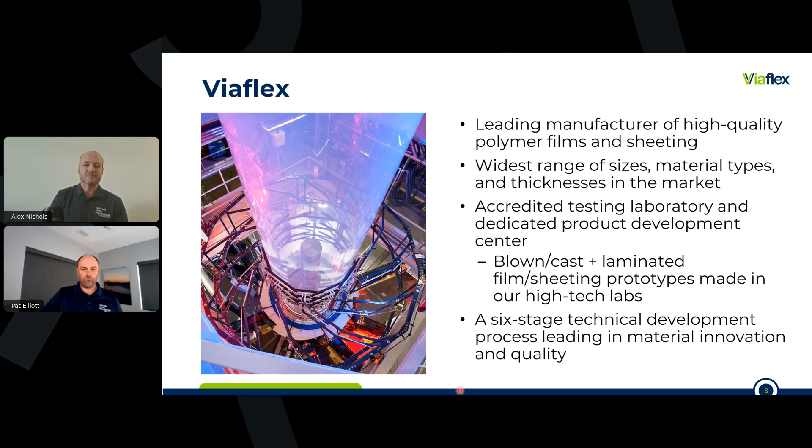So like I said, Viaflex is manufacturing out of Sioux Falls, South Dakota, formerly Raven Industries. Raven acquired Colorado Lining back in 2017. Colorado Lining was a fabricator and an installer of geosynthetics, geomembranes. Raven acquired us, and then basically became another, a private equity firm after that, becoming Viaflex. We manufacture out of Sioux Falls, fabricate out of Madison, South Dakota and Midland, Texas, and then install out of Parker. Colorado Lining's been around since 1978, doing installations all over the world.

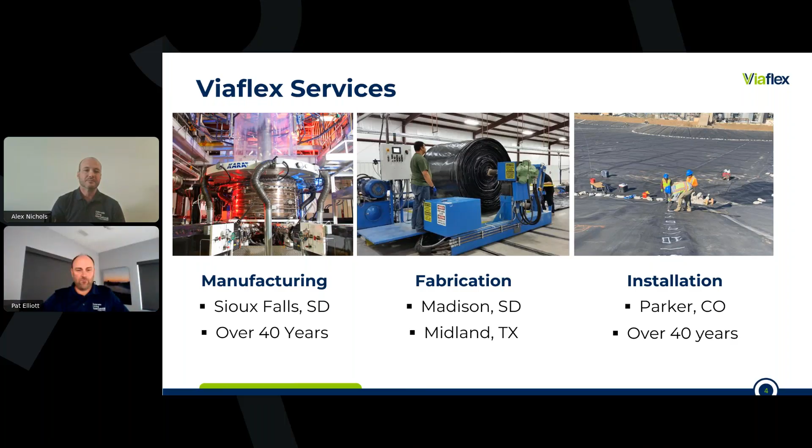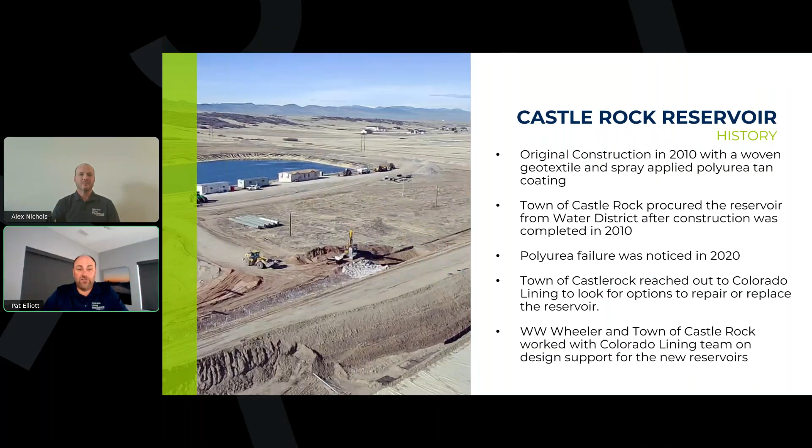We spent... here, let me advance the slide. So this is the original Reservoir Number 1. When it was constructed, the construction design was actually a woven geotextile with a spray-on polyurea. And as you can see here, that began to fail.

In those numerous visits I was talking about around 2020, we started to see all this failure, and we could see a little bit of the exposed geotextile. The reason I picked this photo is because it's a little more up close, but these streaks you're seeing are because this was a spray-applied membrane. What happens is, depending on the thickness, it relates to how quickly the operator spraying the polyurea moves.

If he goes fast, it's a thinner layer. If he goes slow, it's a thicker layer. So what you're seeing here is, as the sprayer works his way up the slope, you can see there's overlap. These lines going up are from where he did one pass and then covered that other pass. So in those areas the polyurea is twice as thick, and you can see it didn't fail. It began to fail in the thin areas faster.

So around 2020, when we made our first site visit, they asked us to look at options to repair this. Obviously we do traditional membranes — LLDPEs, polypropylene, CSPEs, HDPEs — membranes like that. But we weld all of our membranes, so you can imagine we didn't really have a good solution to fix this. We talked about lining the slopes and trying to secure it around the perimeter, but no real good solutions came out of those meetings over a few years.

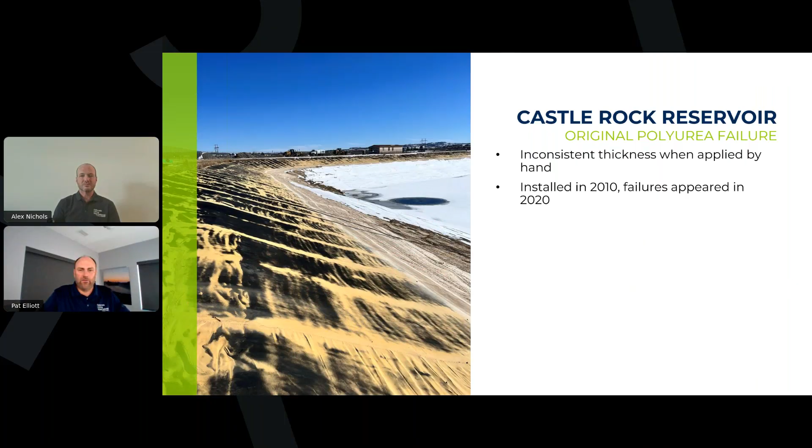So some of the design challenges we came up with: the town required increased water storage over the original reservoir. Douglas County — Castle Rock is the county seat for Douglas County, which has been one of the fastest growing counties in the nation for 20 plus years. I can even remember when I moved to Douglas County many years ago, it was top 4 for 3 years running, about 20 years back.

So it's just an ideal place to live, outside the city. A lot of people are moving to Castle Rock, to Douglas County. The site, since it was already secured — I'll show you the next slide — had a lot of topography. It wasn't a river, but near a river bed, a low-lying area with a seasonal creek running by. So the topography was difficult, and it made it a challenge for W.W. Wheeler to make the dirt balance work. They also needed to keep the reservoir in service during construction, so the goal was never to go offline. The ideal situation was large, deep reservoirs to increase water capacity.

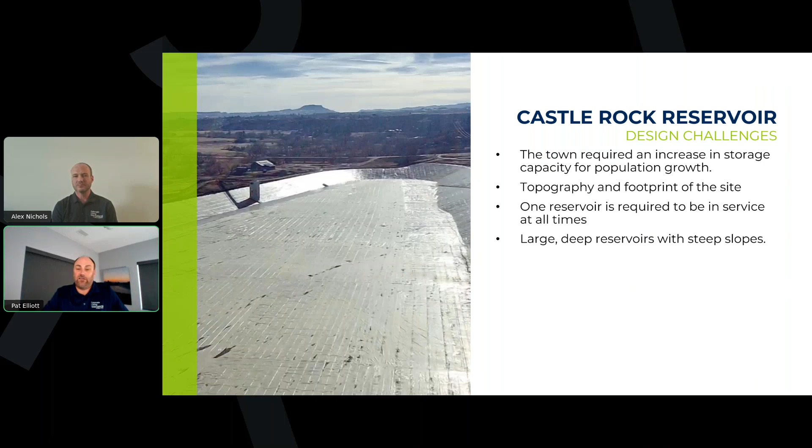As you can see here, this is kind of a fun slide. I actually took this out of seat 11A on a United flight coming back from Phoenix one time, so it's a fun photo. As I'm taking this out the window, I got a nice aerial shot. This is during the construction of Reservoir 2 — you can see the geotextile here and the tan liner going in. So this was while we were currently active working on Reservoir 2.

So again, some of the design challenges: they required a second reservoir, so they wanted a larger reservoir built up. One challenge was this low-lying area where it was required to build Reservoir 2 — there was a tremendous amount of soil that needed to be built up to get this reservoir to the right elevation, since the west side to the east side of the reservoir was pretty dramatic. They had to build this east side up, I don't know, 80 feet. You can imagine the size of the embankment, so the soil balance was difficult and a challenge.

So one thing we came up with during this process — and we were heavily involved in this with W.W. Wheeler and the town of Castle Rock — is we decided to line the reservoir halfway up. I'll show you the next detail and get more into that. This way we could put the bottom half of this reservoir into service, and then take the other reservoir offline. I'll show you in the next slide.

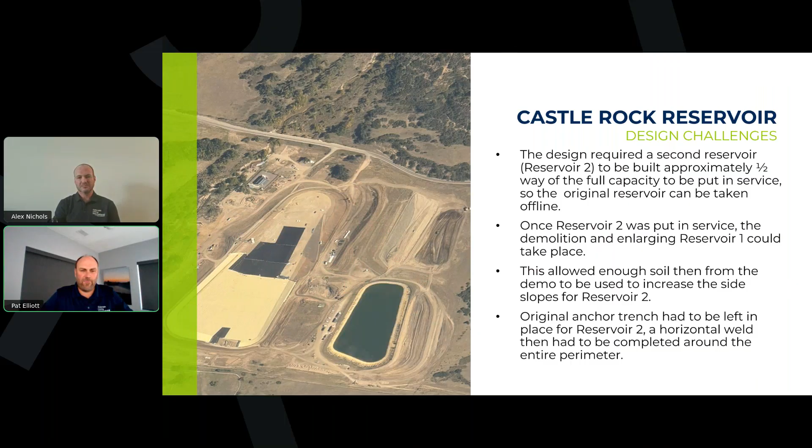So here's a couple of the design details. What you're looking at here is the construction of the original bottom half, let's say, of Reservoir 2, what we refer to as phase 1. The membrane comes up the slope and goes into an anchor trench right here.

HEI is the general contractor, doing an amazing job as well - shout out to them. They built this additional berm, getting the width wider and getting the access road around the top. This was the original phase 1 berm. Since Reservoir 2 was now online on the bottom half, they were able to take Reservoir 1 offline and use that soil to increase the size of Reservoir 2, building this embankment up to get the depth and desired water they needed.

This was a challenge because one of the big no-nos in the liner industry is you don't want any horizontal seams. So what we discussed was we came up with this design with W.W. Wheeler. As they came up and put this in the anchor trench, this material stayed in place. Then when we came in line - and you'll see this in some of the photos throughout the presentation - we lined up here and put a horizontal seam all the way around. But we did not use a traditional wedge welder where we'd cut the membrane; instead we overlapped and did an extrusion weld. That way we could keep the anchor trench in place and eliminate the stress of that horizontal weld.

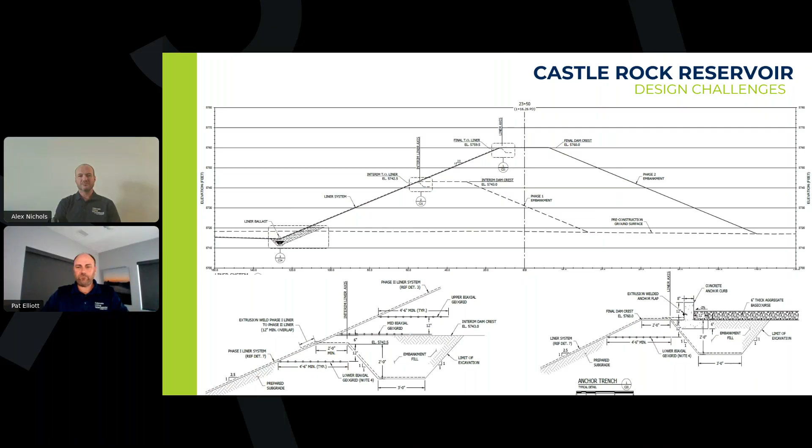One of the neat things about this project is we had another project, the Chambers Reservoir, and I've actually done some presentations at shows on this reservoir. This reservoir is in Parker, Colorado, our hometown, and it was for Arapahoe County, a neighboring county. The reservoir actually sits inside Douglas County, but Arapahoe County owns and operates it. We had the unique ability to learn and mimic things they did, and learn from lessons learned and challenges we faced on this project, which we completed around 2019.

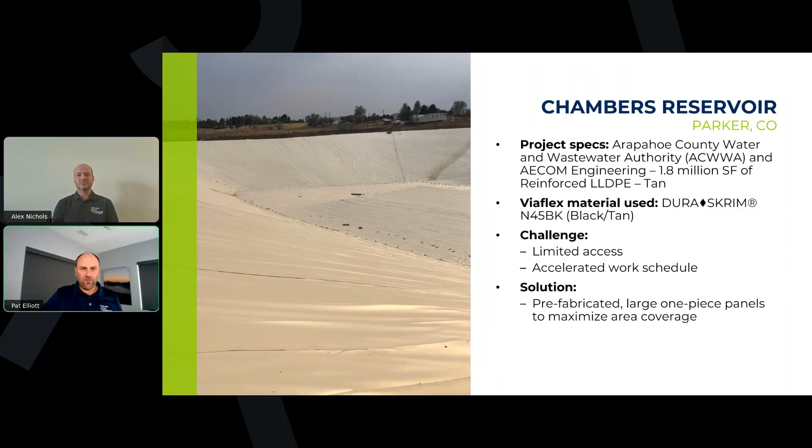Both of these projects are a little near and dear to my heart, probably to Alex too since he grew up in this town. You can see off in the distance, it's small, but that's my kid's high school. During construction of this reservoir, I got a text from my 17-year-old son saying your crew's working out there, telling me who was working and who wasn't - that was kind of fun. Also my mom lives in Castle Rock, so it's fun that these projects are close to our home.

So some of the lessons we learned: tan material for water temperature and aesthetics. Castle Rock mimicked that as well. The town of Castle Rock liked the look of Chambers Reservoir, liked that tan look, and liked the reduced heat it provided.

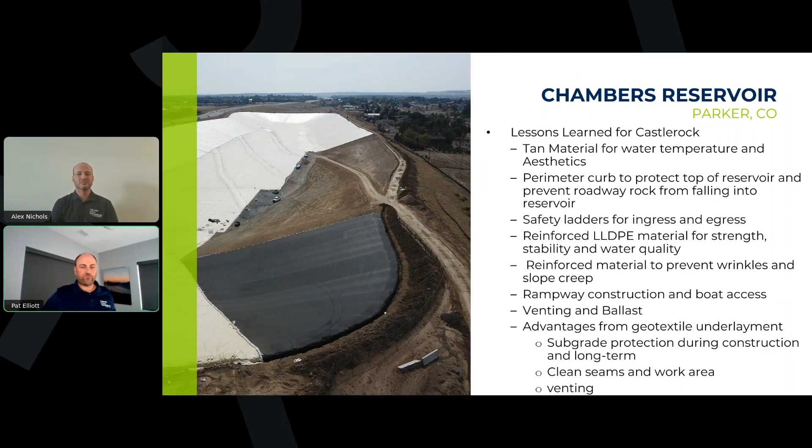All right, so I'll talk about these different things. The tan material, like I said, they liked the look of that at the Chambers Reservoir and wanted that same look. They also liked the idea of reduced temperatures from the black membrane, even just the temperature of the black membrane to touch, and purely for aesthetics.

You can see here some of the details I'll get into. In this photo, I want everybody to make a mental note, see this rock around here? This was something happening at Chambers that we wanted to prevent at Castle Rock, so I'll show you how we did that and mention it again, but this photo kind of illustrates it.

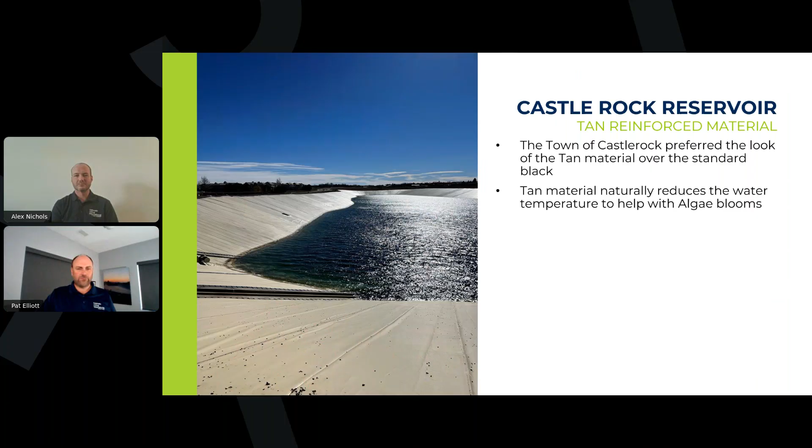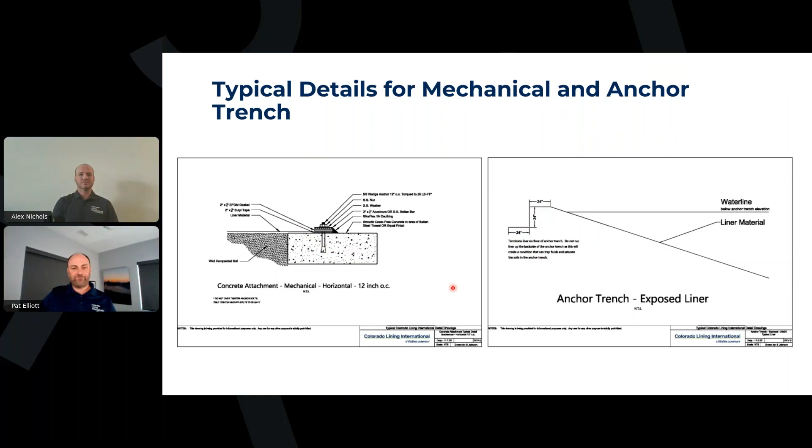As you can see here, here's the anchor trench I was showing you, and you can see the run out. This is important to prevent problems during construction - if that membrane comes up and drops right in, this crest here can get knocked down, and you lose a nice clean edge and some of your freeboard during construction. So it's important that this dirt work is done well and you've got a nice wide area right here.

One of the things I want to note about this phase 2 construction is doing this seam over the top of water was a little crazy. We actually had to put in several extra safety measures, especially since this is not a textured membrane, it's a smooth membrane. So imagine working on a side slope doing hot air welds all the way around this perimeter. We did get some rain events, and we had to make sure guys had people up top that could get them out in the event of rain, because we don't have the safety ladders installed yet. So we had temporary safety ladders, we had guys tied off, and we made sure the cords wouldn't allow a dropped heat gun or welder to reach the water. So we had to put in extra precautions.

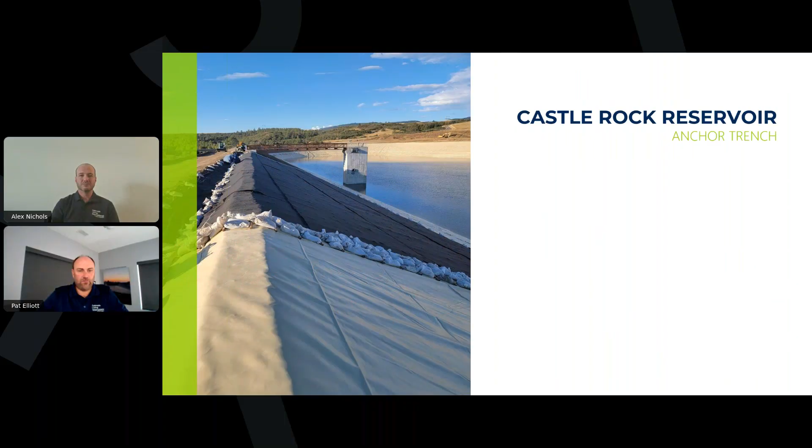When Kevin was talking to W.W. Wheeler about the Castle Rock project, they got the impression this is something they didn't want to deal with themselves. That's when they came up with the design to put in this perimeter curb.

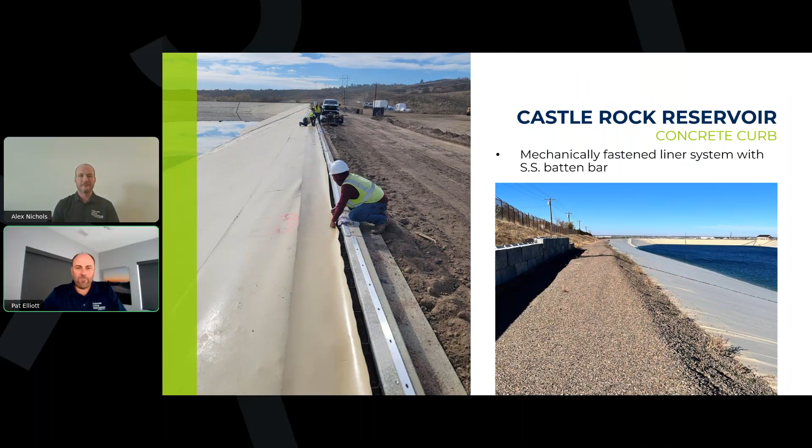And this is important. They can also use these to access the water for doing water testing, sampling, anything like that.

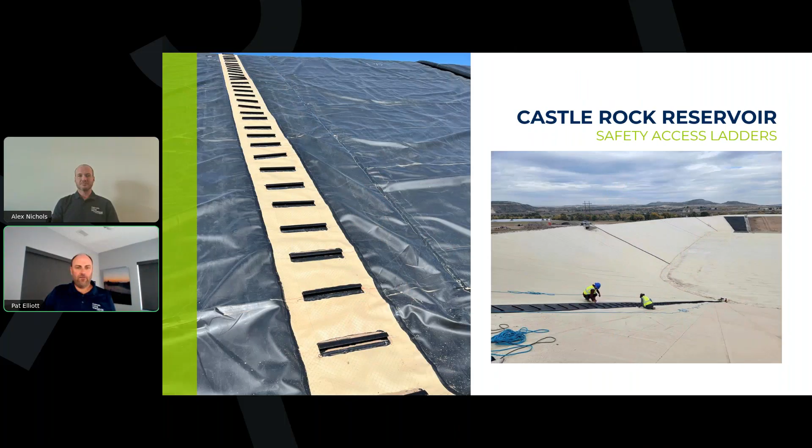High strength reinforced material. I love this, I love these pictures. Like I said, these projects are a little near and dear to my heart, I have a little fun with these projects. But you can see here, we got a nice large tower. This is mid slope, so we're mechanically fastening the footer around this large tower. You can imagine how much stress that could put on that mechanical attachment. That reinforced material locks in very good.

You can see how nice and flat this liner is around there, so when we're securing that, it's going in nice and we don't have wrinkles. Reinforced materials don't have a tremendous amount of expansion or contraction, so we're not getting a tremendous amount of stress on these critical connections. You can imagine, this is mid slope of a 140-foot slope, you do not want a tremendous amount of stress on this mechanical fastening.

And there's several structures in Castle Rock, this just happens to be the biggest one. The picture on the right is actually back to the Chambers Reservoir. And I say that our liners are car crash proof.

The reason for that is because the Chambers Reservoir, named after Chambers Road, which runs parallel to the entire reservoir, and it's about 40 miles an hour right there, two lanes each direction. It's a fairly sizable road, not a tremendous amount of traffic on it just because of where it sits, but it's access to C470, a large highway that perimeters around Denver, sitting right off to the north, so it's a big thoroughfare to get to the highway.

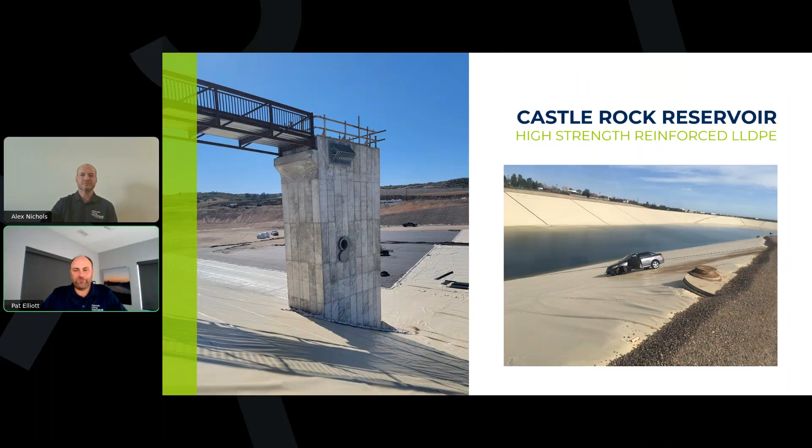All right, back to Castle Rock. What you're seeing in this picture is I'm standing on the floor as I take this photo, and the reason I love this photo is because you can see here there's no wrinkle. This is the slope creep I was talking about, coming from the reinforced materials that have greater dimensional stability and less expansion contraction.

So a lot of membranes are affected. You get a nice hot sunny day, get a lot of wrinkles, get a nice cool night, they shrink up. And what happens if you have that kind of a long slope all the way, a 160-foot slope, you can get that expansion contraction before you have a big wrinkle down here.

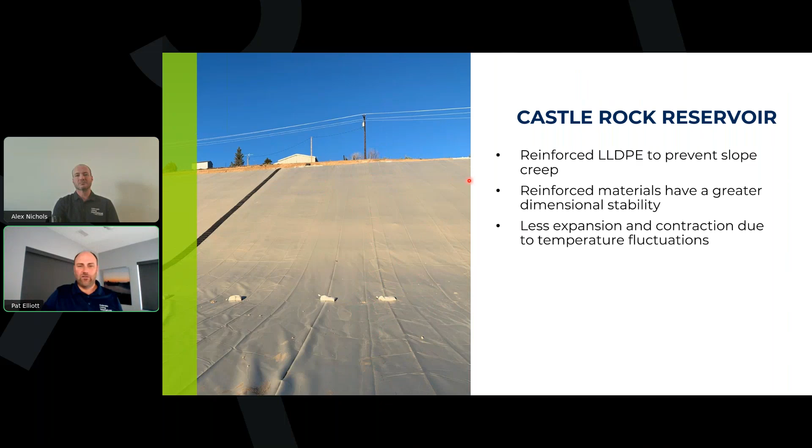And I love the way this is laying in here. I mean, you get great intimate contact with the subgrade, just really, really good, lay flat, sitting against that subgrade. A lot of benefits to that.

This next photo here, these next photos you can see, this is an unreinforced material. I like this one because you can see we're testing this weld here, and you got this giant wrinkle right here. And what's happening, same thing in this photo, is you got a sunny day, and this all...

Everywhere deals with temperature fluctuations. Colorado can be a little extreme because we have 300 days of sunshine, so we have a lot of sun, and we have high UV because we're closer to the thinner atmosphere that filters out the sun. So we get high UV, high temperatures, but really cool nights. It's not like Phoenix where it's 90 degrees when you wake up on a July morning. Our July mornings are still 65 degrees.

So you get these 35, 40 degree temperature swings every day. Today it's going to be probably 64 out, but we're going to be in the high 20s by tonight or tomorrow morning. So we get these high temperature fluctuations, and what happens is as it expands and contracts, you get this nice big toe wrinkle. Well, that can be a real problem if you have 160 feet of head pressure pushing down on a wrinkle like that. So the idea is you don't want these wrinkles in a toe.

So that was one of the big reasons we chose the reinforced material and the tan material. Tan helps with that too. Black gets a lot hotter, so that tan is another advantage of going with a tan material.

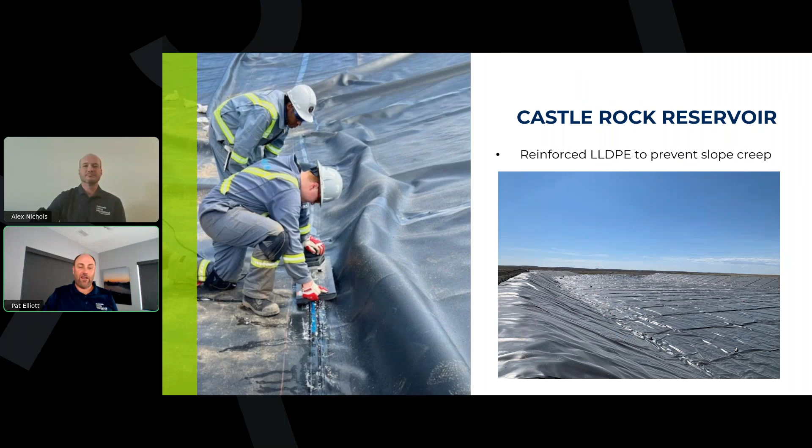All right, here's the boat ramp.

Kind of interesting - some of the things we learned at Chambers was we put a ballast tube. You see these ballast tubes laying here, and we put the ballast tubes in this toe to keep that down. We actually put them on this side too here at Castle Rock. When we were constructing Chambers, we had these tubes down the toe of this slope going down at an angle.

We had a snow event, got 6 inches of heavy snow. It landed on the liner and there's 6 inches of snow. Then, in typical fashion, 2 days later it's 50 degrees. Now we've got 6 inches of snow sitting here with 50 degrees. It starts to melt and big slabs of snow are sliding down, ripping the tubes and pushing them across the ramp.

So we decided to come in here and weld a cap over - I'll show you this in one of the last photos too - but we welded a cap over the top of those tubes, and that prevented them from moving. So that was another good thing, kind of fun that Castle Rock got the benefits of us learning all these lessons on a nearby project.

This right here - these were crazy, we didn't have anything to do with them, but they were precast concrete rolls on like a heavyweight grid, and then they cast concrete, almost like a sheep's foot, like when you're rolling a pond. Basically it was precast concrete poured on top of a grid. These rolls were, I think, 6 foot diameter by 15 or 14 feet wide. They were like 50 feet long, and they came on this truck - these things must have weighed like 14,000 pounds per roll. I think they could only get three or four of them on a truck.

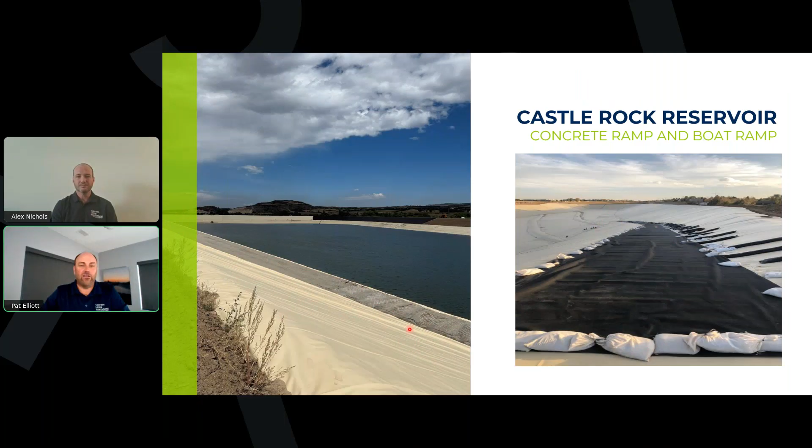All right, so I'm going to talk about some of the advantages of the geotextile that we experience. I think this applies to 95% of the projects - let me rephrase, 90% of the pond projects that we do, any sort of water containment projects. You get this geotextile, it's a heavyweight fabric, and you put it under the membrane. It does several things - there's so many advantages. As you can see here in Castle Rock, off here in the distance you got this nice sand layer.

So as you know, when you're digging a reservoir 60, 70 feet deep, you're going to get different sand, different soil layers, and we had a sand pocket. Why this is significant is that geotextile is going to help lock that in long term. We face this a lot in the West - you get the sandy subgrades.

You just put the liner over the top of the sandy subgrade, and then you get heavy winds. Now you got wind uplift if you don't have good venting and good ballast. You get wind uplift, and then you get these wave actions that just beat on the slope, because you got the wind coming across, lifting the liner up, then you got waves hitting that membrane, and it actually loosens the soil layer, and you'll begin to see sloughing underneath the membrane. Very common issue that we have out west, especially in western Nebraska, Kansas, eastern Colorado, Wyoming. We get these sandy layers.

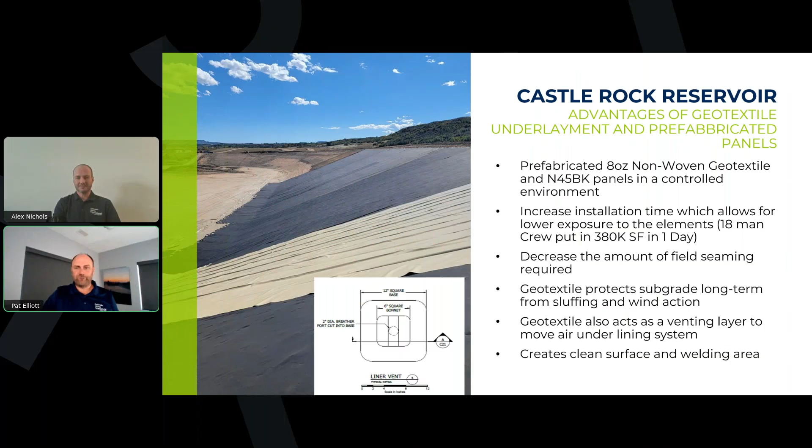You can see here some of the statistics on the job: 2.7 million square feet of geosynthetics, half and half of textile and membrane. You've got 1,105 ballast tubes, which we put around the entire toe and up and down those ramps, plus 10,200 linear feet of mechanical attachment onto that curb around the perimeter that we discussed.

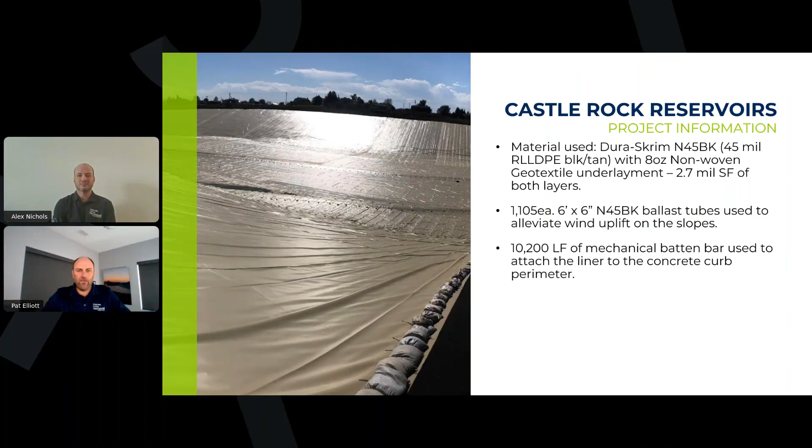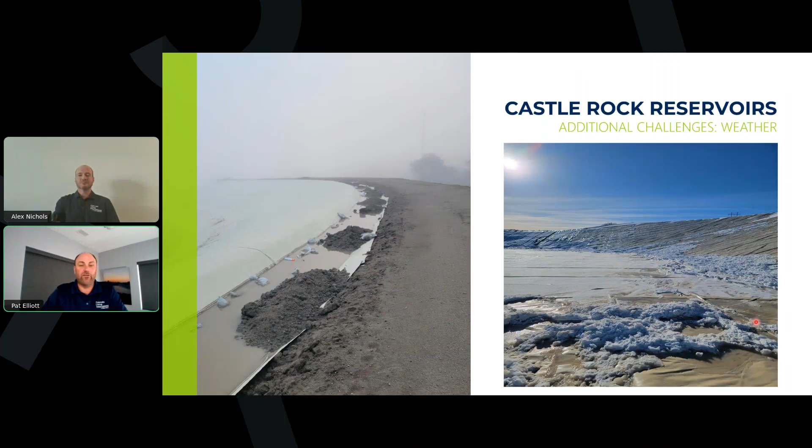Once again, we were finishing phase one of reservoir 2 last fall, and you can see how much snow we got and how difficult this was to deal with. So weather is always a challenge, we're constantly dealing with that.

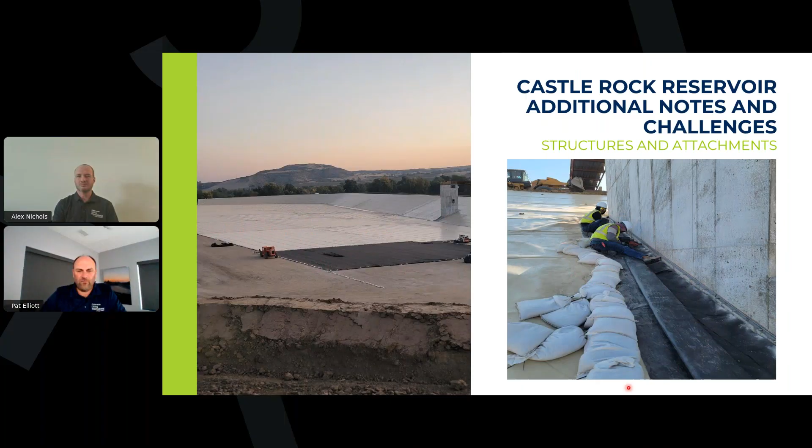This is another thing we learned dealing with the Chambers Reservoir. Here's a mechanical fastening down to this structure, and they're going to secure a metal depth gauge to this. They liked this design because they had to put this in for the valve construction anyway, so we went ahead and secured the liner with mechanical fastening so they could mount their depth gauge to it.

And this here was an interesting detail. What you're looking at here is a black membrane, same membrane, just black. Right here at the top, we actually sewed in our factory in Madison a Velcro strip on both sides.

You can open this up and lay pipes for aerators and stuff like that. They had some pipes they wanted to lay in here, but the concern was if we secure them to the liner and then something happens to the bubbler down here in the bottom and they have to remove it, they don't want to have to drain the entire reservoir to remove that.

So we came up with this design, and we actually came up with it from our ag division where we do tarps over the top of silage piles out in the farmlands. They use this detail to secure the different panels together. So kind of a fun detail, a unique way of doing it.

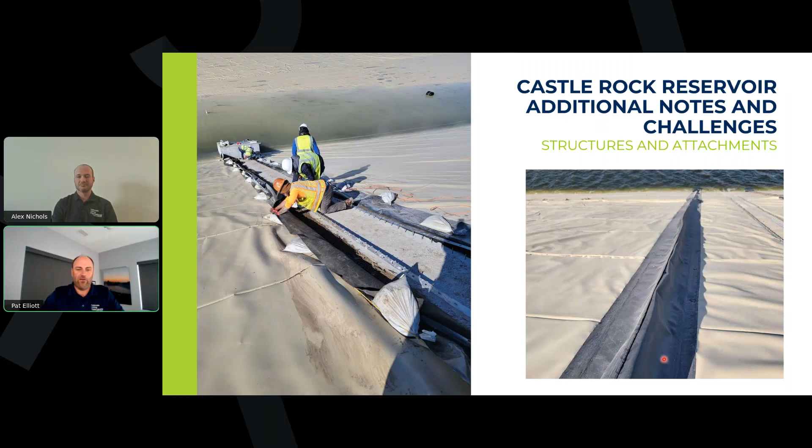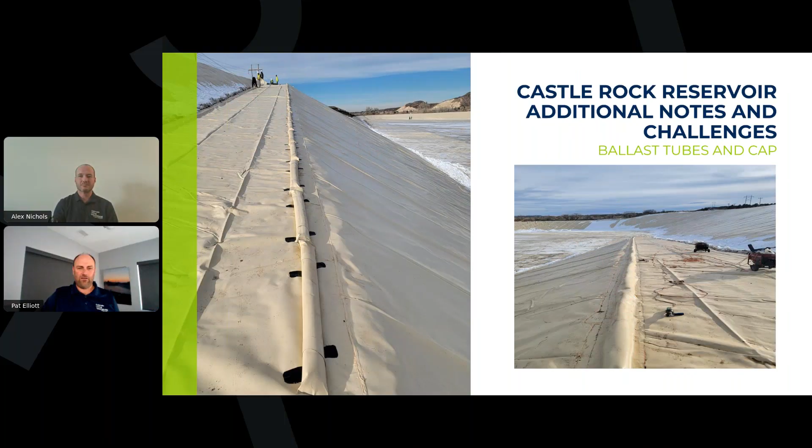All right, I think I'm to questions now. So if anybody has any questions, please chime in. I'd love to answer them or hear what you have to say.